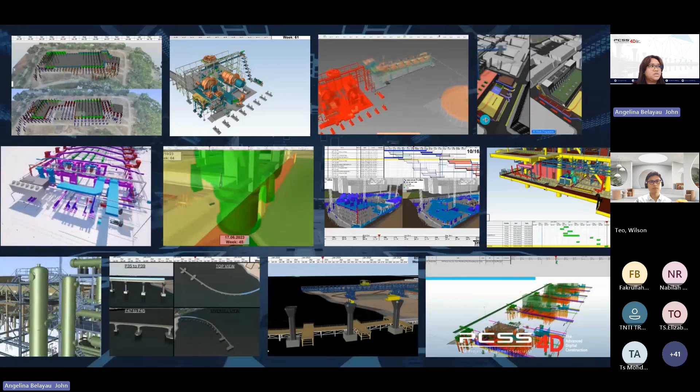Before we begin, I would like to do a little introduction of PCSS. PCSS is a project management solutions provider focused on enhancing organizational profits through the implementation of industry-leading practices. We specialize in digital construction, covering BIM (building information modeling), 4D simulations, and optimization tools such as drones, AR, VR, to name a few. This emphasizes our dedication to staying technologically advanced and providing innovative solutions for the digital transformation across the construction industry in the region.

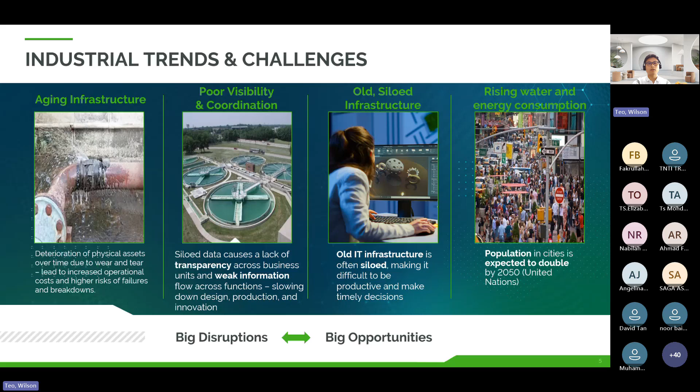Research shows that global population in city areas is expected to double by 2050, and the pressure is increasing. We see that 30 to 40% of fresh water is lost to leaks before it reaches homes, and one city in the US even reported a 40% loss and had to issue a boil water advisory after a major break. Regulatory changes and customer demands for new services mean we need to adapt quickly, and that's why digital transformation is so critical.

Next, we're going to talk about how operational intelligence can benefit the smart water, the water industry. Operational intelligence is all about getting the right information to the right people in the right context. We use our solutions to collect, aggregate, analyze, and display the data across operations to ensure compliance and support accurate decision making.

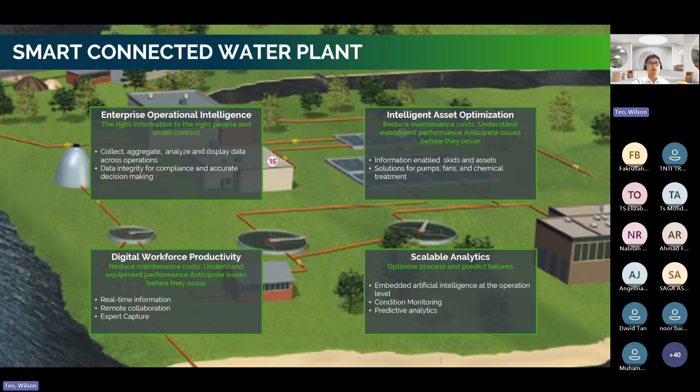So over here, I just want to show you how your smart connected water plant looks like. We are talking about smart plants, smart equipment, smart devices nowadays, and all of them are working together. You can see that all these smart systems generate data, and therefore all this data needs to be collected in order to understand the entire ecosystem. We need a solution for that data collection, data visualization, and analytics.

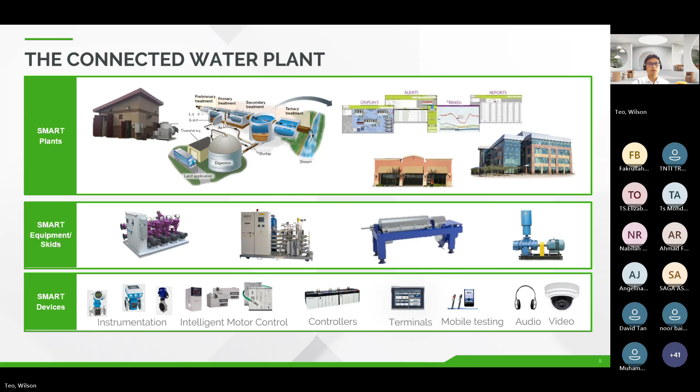Most of the time, they are running in silo or they are not even being connected. So in order to understand the equipment itself, we have to retrieve, we have to communicate with these assets. That can be achieved by Kepware, where we can connect to all the different kinds of assets, all the different kinds of sensors that we are operating at the shop floor or on the field.

And once the data is collected, this information will be fed into the IoT platform called ThingWorx, where the data will first be contextualized. We build models around this data because the data is just a number - without any meaning, without any context, the data will be meaningless. So we contextualize data and then we manage the data - we build workflows around the data itself to automate certain kinds of processes.

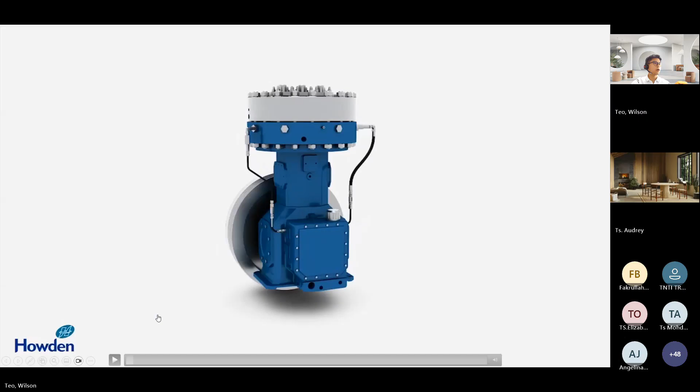Hold on, can you guys hear the audio of it? There's no sound. Maybe you need to include sound when you share the slide.

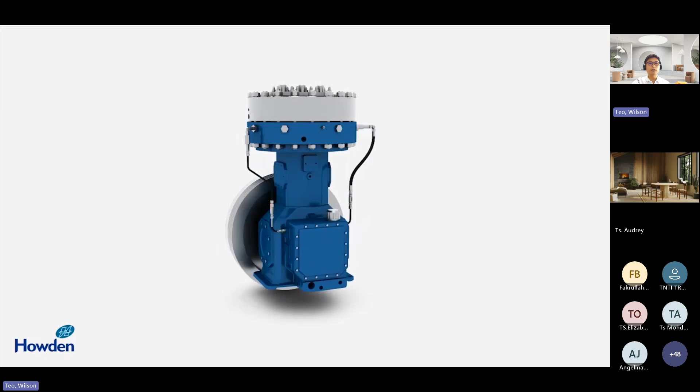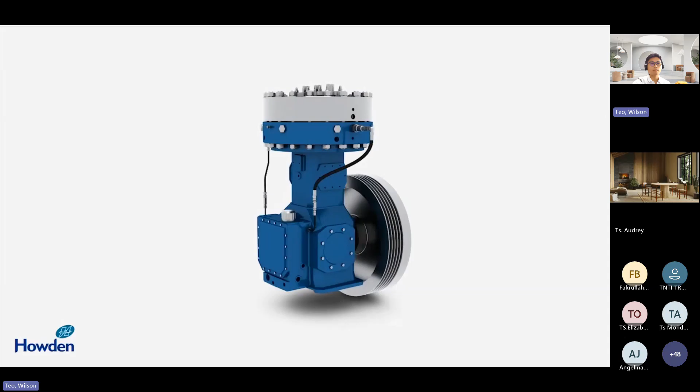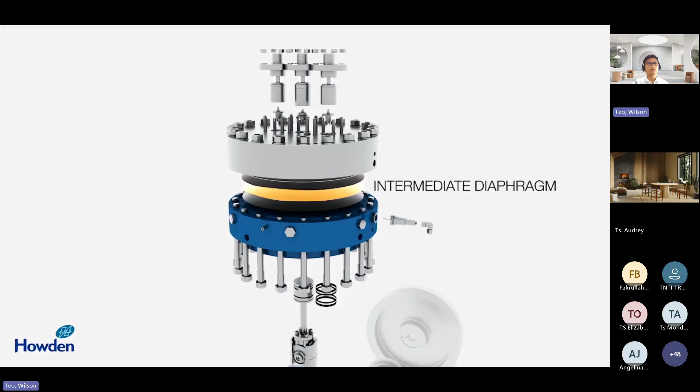In a wastewater treatment operation, diaphragm compressors are often used to convert low-pressure gas or liquid to high pressure through a flexible membrane. Typically used in situations where complete hermetic separation is required, the compressors often handle toxic, flammable, or explosive gases. In our case, this compressor injects oxygen into sedimentation tanks to accelerate microbial sanitation processes. But when a compressor goes offline, it's critical to diagnose and service it as quickly as possible to avoid costly repercussions and keep the plant running at full capacity.

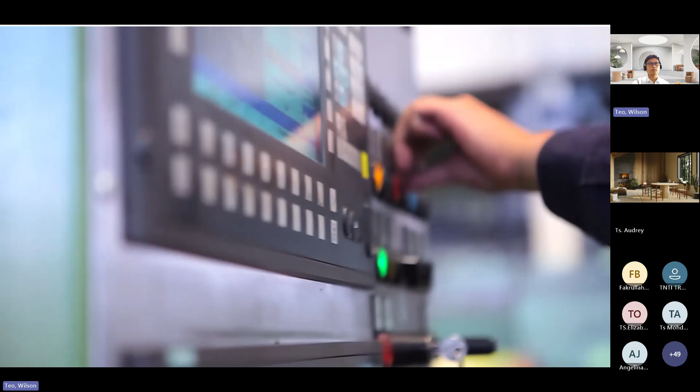With service operations becoming a new profit center for today's global manufacturers, providing tools to efficiently and effectively perform field service is imperative. Through the ThingWorx role-based dashboard, monitoring a fleet of assets deployed at customer sites worldwide provides the real-time data remote technicians need to stay ahead of equipment outages. With this general view of assets, information like model and serial number, location, performance and sensor data, maintenance logs, and predictive analytics, service techs can avoid future failures.

Through the dashboard of all the plant's diaphragms, we can select Diaphragm 1 and see its performance, status, and historical data over the time it's been deployed. Although this asset is showing its status as good, ThingWorx is predicting abnormal activity. For more context, we can view Connected Info, where we can see the readings from the compressor.

There are no active alerts for this machine, but there is a predicted alert for a pressure leak which has been flagged. By constantly analyzing asset condition data and historical data from similar compressors, ThingWorx creates prediction models for the most critical problems. To understand and proactively diagnose the potential issue, we can easily review historical data for pressure, flow, speed, and power on this unit.

Looking at the low pressure and flow rate, we can investigate the predicted failure and determine that this compressor is trending toward a diaphragm rupture.

We've decided that the best course of action is to deploy a field technician to replace the physical part. ThingWorx lets us easily create a service ticket to dispatch a technician with the exact information needed to resolve the problem. With ThingWorx's connectivity, real-time data is brought to the forefront of service operations.

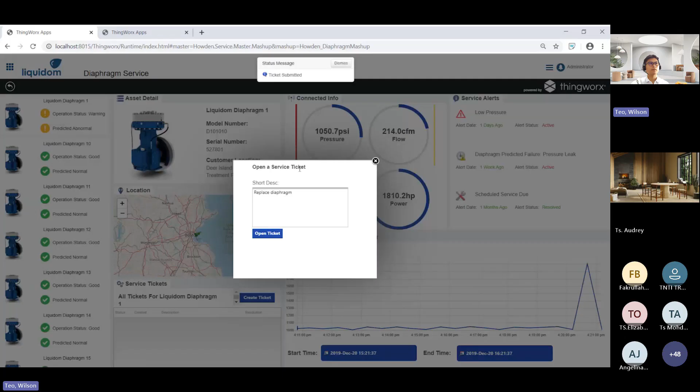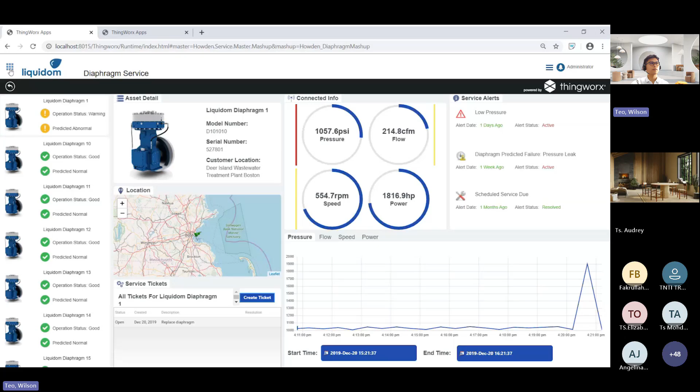On a macro level, the same real-time data acquisition and machine learning can be applied to an entire enterprise. For a plant manager, monitoring a fleet of different assets from different vendors can be complicated and overwhelming. With compressors, blowers, and pumps from vendors like Howden and Flowserve, managers must ensure all assets are operating individually and as a system.

Like the service technician, a plant manager can easily see all individual assets with performance and alert statuses. But a plant manager needs to know more than just the status of individual assets - they need to know the status of the entire wastewater treatment process.

To monitor the entire enterprise's performance, ThingWorx provides an operational overview of the plant, from the intake of raw wastewater via the influent pipes to the sedimentation and aeration processes, through the 3 clarification tanks at the top to the eventual discharge of treated water. Machine performance data and sensor data tracking can trigger alerts and notifications through the sanitation process.

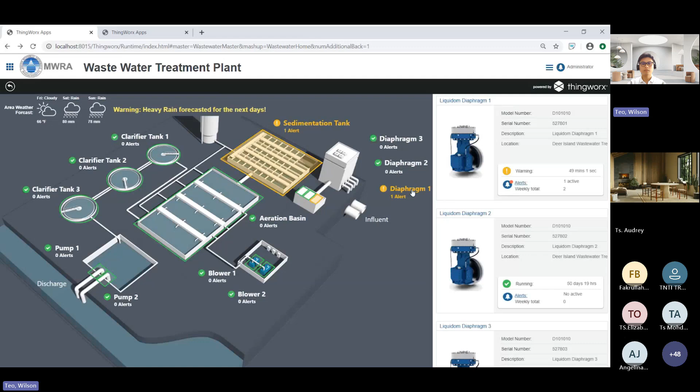In our dashboard, we see the status of Diaphragm 1 has changed from green to yellow. To understand the issue better, we can select the alert link on Diaphragm 1 to view alert details and the compressor's alert history. We can view Diaphragm 1's details to examine the change in the recorded pressure. The alert details reveal low pressure from this compressor, which indicates we have a rupture in the diaphragm.

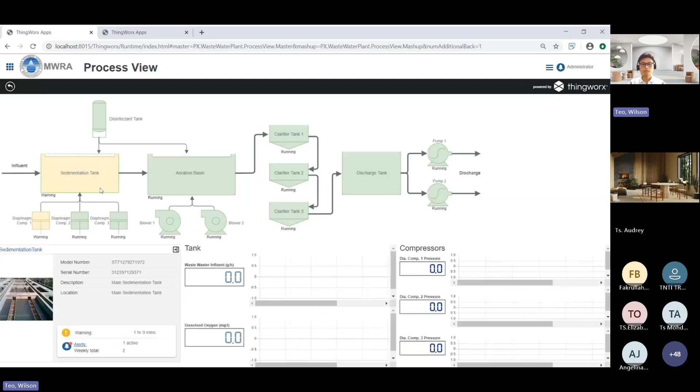In addition to seeing implications on an asset level, we can also see how the rupture is affecting the entire process. From the process view, we see that both Diaphragm 1 and the sedimentation tank need our attention. We've already seen that there is low pressure in the compressor, but we need to understand the issue in the sedimentation tank. Selecting the sedimentation tank shows the dissolved oxygen level is decreasing because the compressor is operating below spec.

This impacts the efficacy of the tank's biological components, slowing the sanitation process and ultimately impacting our ability to achieve KPIs at the plant.

To ensure the rest of the compressors feeding the sedimentation tank can sustain the added load, we can check their status as well. We even have the option to use ThingWorx Flow to automate load balancing across the available compressors, freeing up time to fix the broken compressor without compromising the rest of the treatment process.

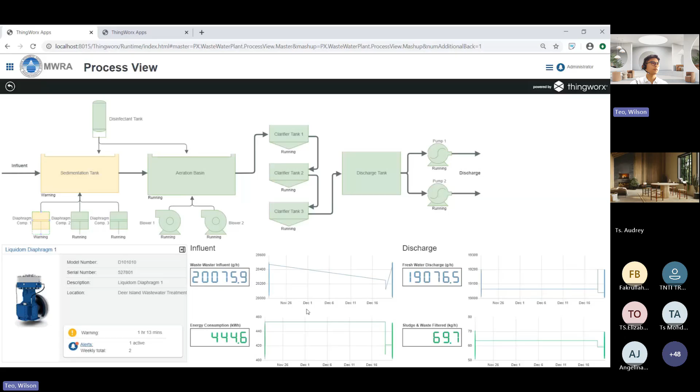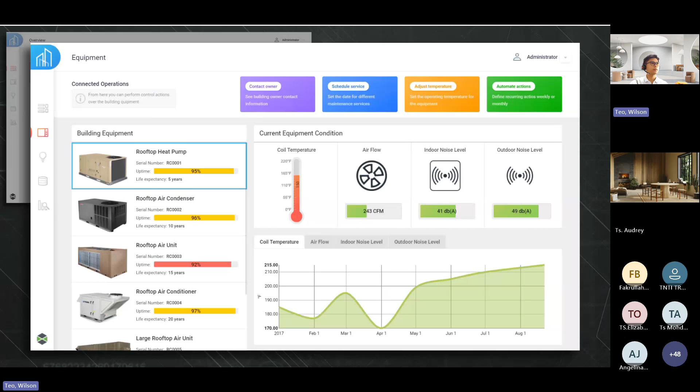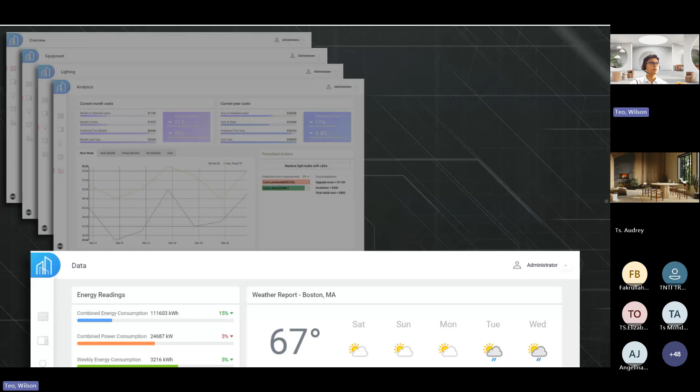With the ThingWorx industrial IoT platform, those tasked with maintaining and managing buildings now have detailed insight and control over their assets. With ThingWorx and our partner ecosystem, you can attain higher performing buildings by creating a new breed of smart applications that delivers energy consumption dashboards and building performance benchmarks, applications to remotely monitor and control heating, lighting, life safety, and security systems, predictive maintenance and condition-based monitoring, and desired environmental conditions and occupant comfort.

With smart, connected applications created with ThingWorx, managing buildings has simultaneously become simpler and more informative. These tools consistently monitor and constantly update, providing managers with the data they need to make informed, proactive decisions, including views of building performance, energy consumption, and the associated costs.

Building performance benchmark dashboards allow managers to rate and compare performance based on various data streaming from both connected systems and connected products. Service costs coming from a CRM system can be combined with energy usage coming from connected meters, creating one dashboard, quickly identifying underperforming buildings and plan corrective actions.

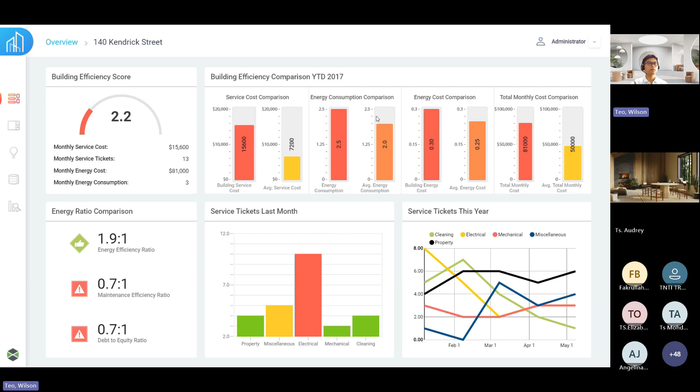When equipment fails, the building fails. Adding a service component to connected buildings, however, brings fast and efficient service for maintaining building uptime.

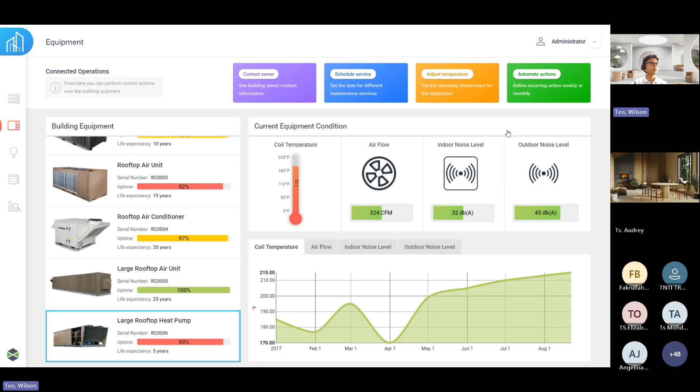ThingWorx industrial connectivity allows solution builders to easily connect and manage the many types of equipment in a building, helping building managers and service departments visualize their equipment, data, and KPIs, while helping to detect issues before they lead to downtime. Combining connected systems and products allows for remote service tasks and scheduling, all from one easy-to-use view.

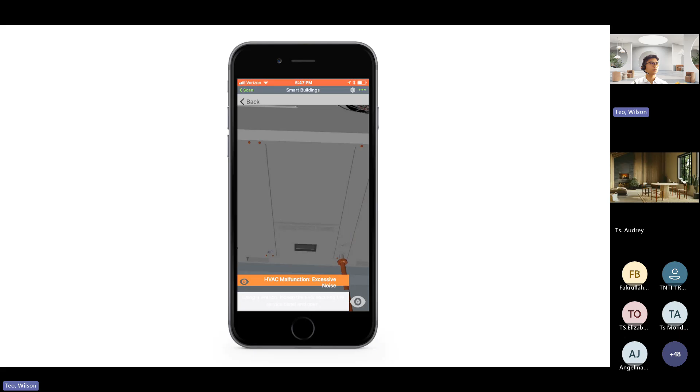Instead of using traditional instructions for repair, a building service department can select AR instructions, presenting easy-to-follow and immersive instructions for equipment repair.

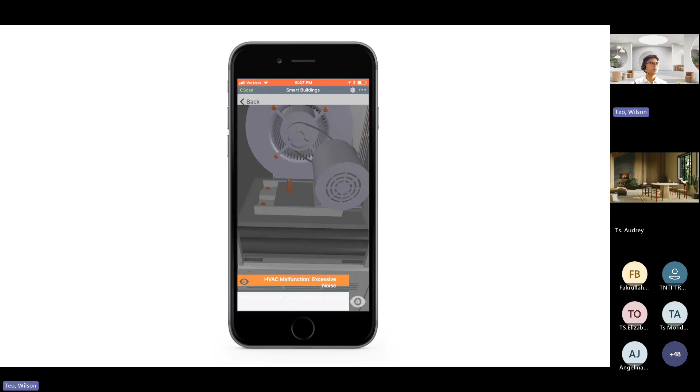Using intuitive, interactive instructions, issues can be addressed and fixed quickly, reducing lost time and cost.

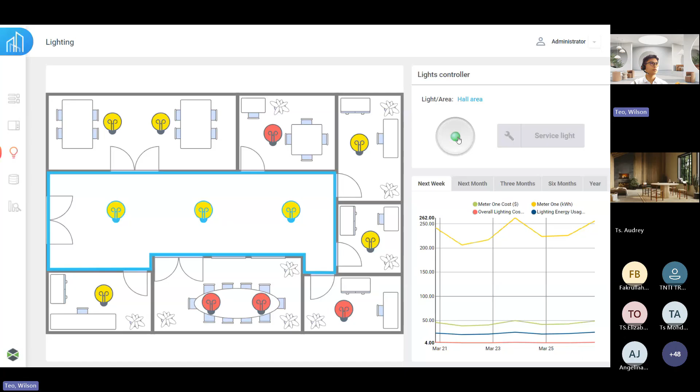Intelligent management of lighting systems is crucial for keeping energy costs in check. With easy integration to smart lighting systems, ThingWorx enables users to create applications to remotely manage lighting and reduce costs, including proactive, autonomous actions to adjust lighting systems based on occupancy.

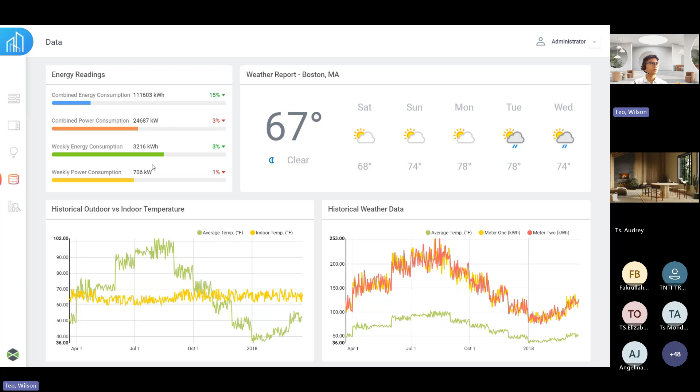In one platform, you can compare external and internal factors to energy consumption, leading to more efficient energy consumption and smart spending. Energy consumption from connected meters can be combined with external data sources, like weather services, to help building managers forecast energy usage. Collecting and analyzing data is the driving force to optimize building operations.

ThingWorx helps customers build a smart building application that pulls and analyzes data from connected products and systems, identifying key trends to help building managers increase operating efficiency.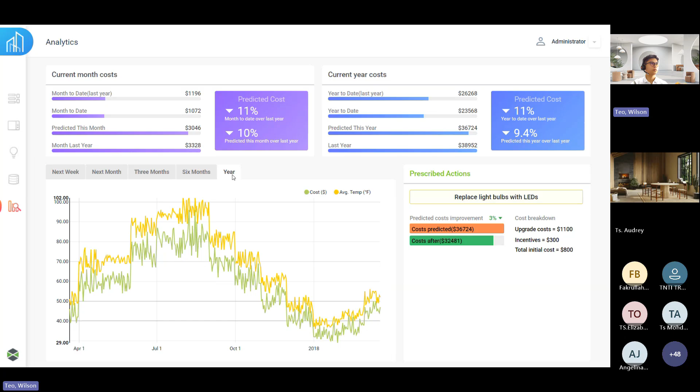A connected building is more than automatic lighting and timed HVAC systems. The connected building is revolutionizing time and cost. With the ThingWorx industrial IoT platform, keeping a smart building running efficiently is a reality, saving the time and money you need to expand and better your assets and services.

All right, so I hope that right now you have some rough idea about how our IoT solution looks like, and how it can be benefited by the water utility industry as well as the facility management industry, like having a smart building, right? So in order to achieve all these solutions that we have seen, I believe that many of you will have the questions.

How do we actually come to that solution? It looks great, right? I want this solution, maybe some of you might be thinking. So over here, I will actually go through with you the how, the behind the scenes. How do we actually come to that kind of solutions? So that you can understand better, and also try to see how these applications can fit into your infrastructure and bring more value.

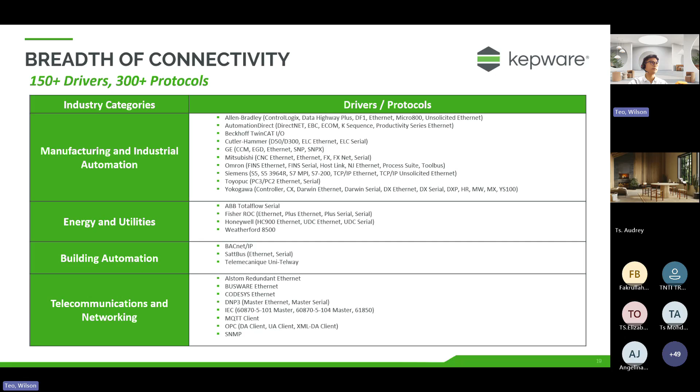These are just a snippet of the entire set of drivers available. So if you're working on a project right now, or have certain connectivity questions or issues, maybe Kepware will be the solution, and we can talk more about that in a separate discussion. So after connecting and retrieving all this data, we have to build a data model to add context to the data itself.

So Kepware completes the connectivity, bringing that data into the platform. In the platform, we have to model the data, adding the parameters as properties, for example running hours, sensor parameters, the location of the pump, etc. At the same time, we can build some analytics - simple calculations like getting the running status, the running duration of the equipment, and the maintenance record.

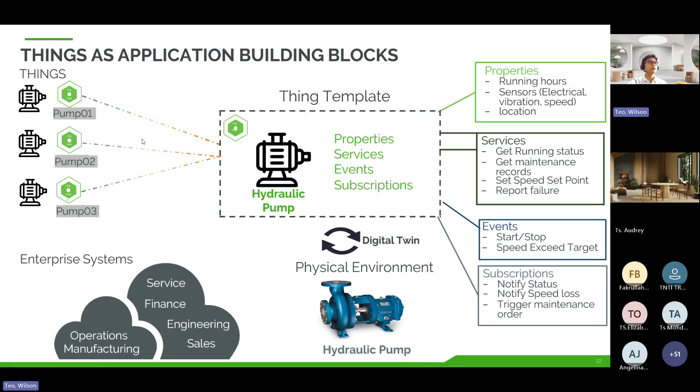So these are just a sample, just one example. You have the properties, let's say the motor speed. And then after that, you can create services to check whether the pump is in running mode, idle mode, or in downtime. So if one of these events happens, that event is evaluated based on the real-time information on your property, then you can trigger an event.

The event itself will be recorded, and subsequently you can create a subscription to subscribe to this event. The subscription will provide or generate notification to the operators or the equipment owner through various ways - for example, SMS, for example, email. So depending on whichever approach you want, we have all this capability built in.

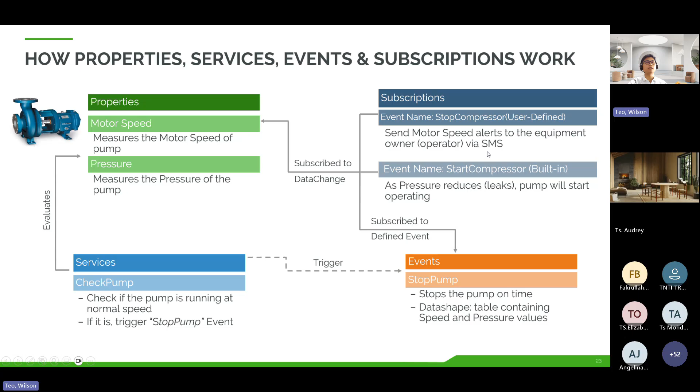So next is analyze. Analytics itself has different levels, and different levels of analytics provide different kinds of business value to the end users. Starting from the low level, we talk about descriptive analytics - basically to tell you what happens. That's mostly after the event has happened, so you want to do some root cause analysis using descriptive analytics.

The next level of analytics is predictive analytics, where you want to predict when this asset will fail, so that you can take preventive measures before the machine breaks down. That is to avoid equipment breakdown - you can do maintenance before it breaks down based on the predictive analytics result.

The last level is prescriptive analytics, which is basically to advise the users what can be done to prevent a certain event from happening. For example, you can suggest that lowering the temperature might prolong the lifespan or operation duration for a pump. So prescriptive analytics is able to provide that kind of information. With all these different types of analytics available within our IoT solution as a built-in module, you don't really need to rely on a separate analytic system to do analytics and then pump back to the systems - everything is in a single box.

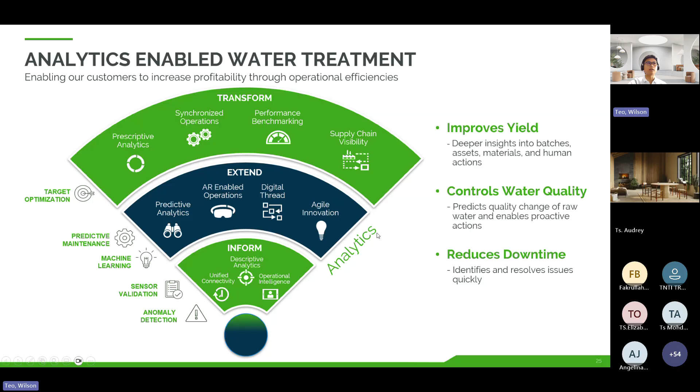Our analytics module can do various analytics like I mentioned. It can show you some descriptive analytics like statistical calculations - the average, the mean, the distribution, the confidence interval, and all that.

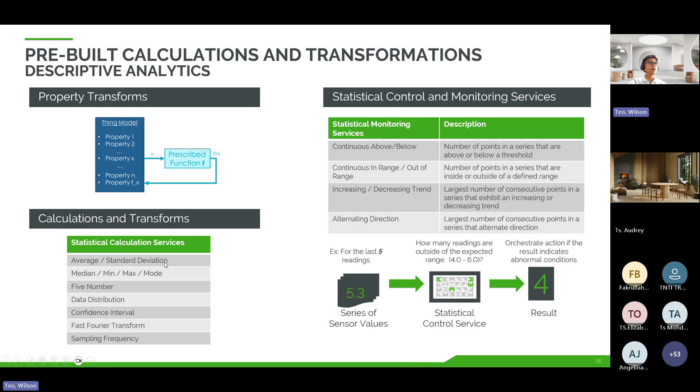After that, the next one is basically doing diagnostics - evaluating the information of your assets, your pumps and all those, and finding the relationship between those informations. For example, if we want to talk about whether a machine will break down or not, maybe the motor speed of that pump has a high relationship, a high significance, to that event. So our analytics is able to generate that kind of information, showcasing what parameters will impact the outcome of a certain event most significantly.

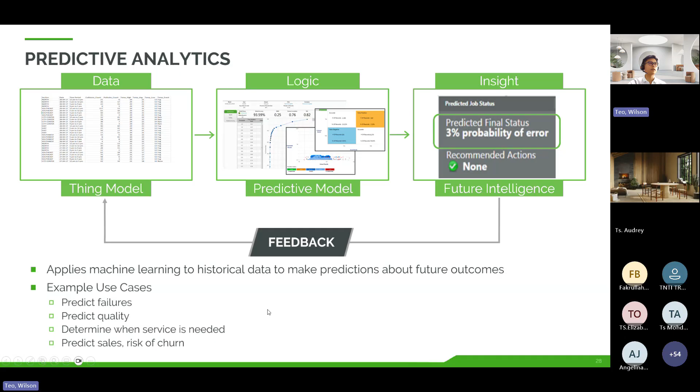So various use cases you can apply with our analytics. These are just some examples for the technical guys who are more interested in what machine learning algorithms are built into our analytics module.

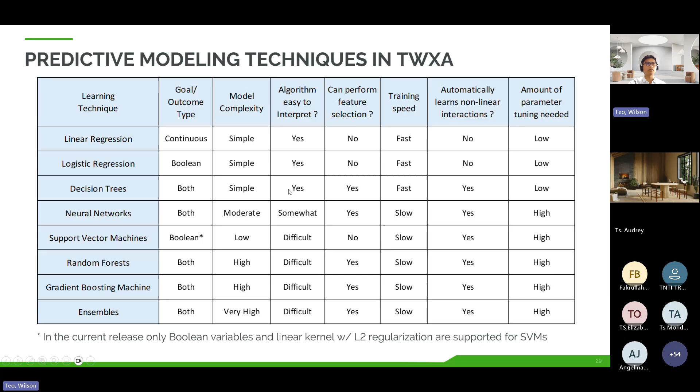Depending on the use case and the goals you want to predict, you can use the relevant machine learning algorithm. If not, the system will be smart enough to help users determine which machine learning technique is most suitable for the use case, based on the accuracy of the models and predictions.

And these are just machine learning. So just now I mentioned we're talking not just about conventional analytics, but now it's more about generative AI—using things like large language models to process your data and generate insights for users. It's like a ChatGPT kind of thing, but applied to your system, your data, your operations.

Let me show you quickly. Within our platform, we've come up with a very new feature, which we call the ThingWorx AI Assistant, whereby we use a large language model applied onto the historical operational data collected from the field, and it tells you the insights from that data.

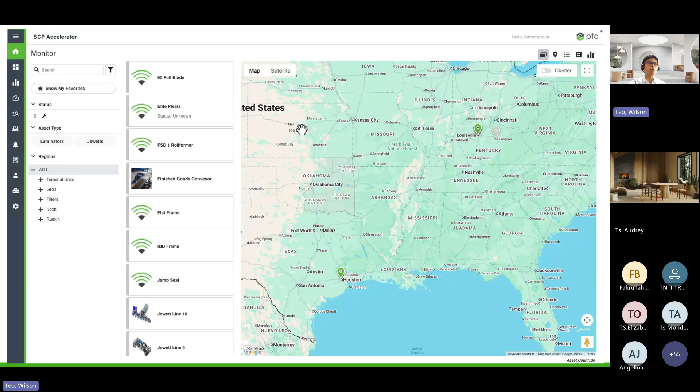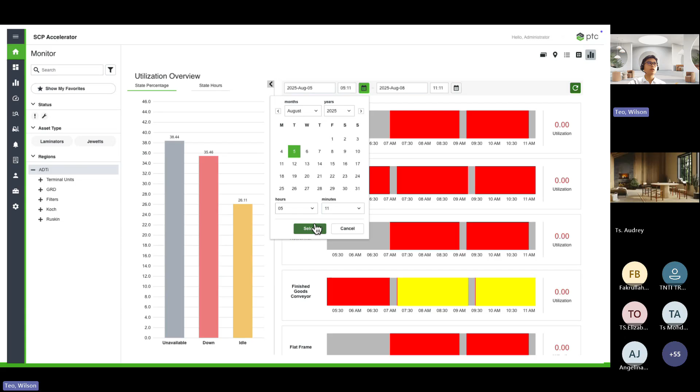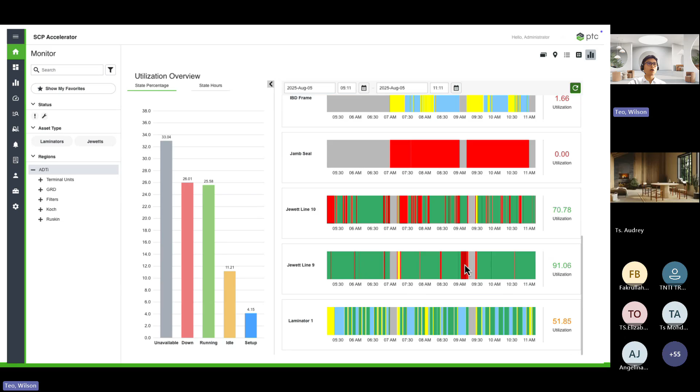Let me play this video to show you how LLM can generate more insights from the collected data. So assuming you already built an application using ThingWorx, this is basically to monitor the utilization of your assets—for example, your pump. You can track when they're running, when they're not running, when they're stopped or in downtime, and different kinds of status. So this is for real-time monitoring.

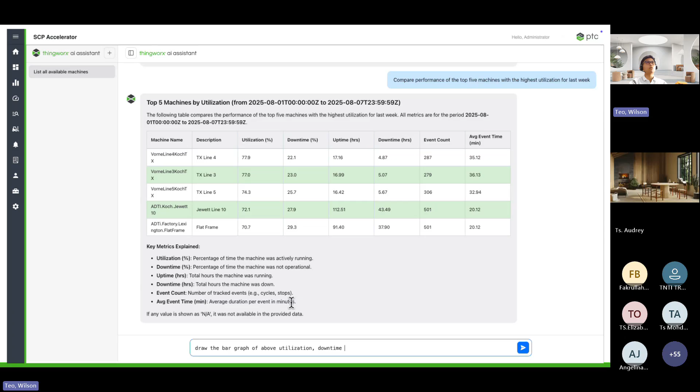With technologies like Gen AI, we can chat with the technology and it will give us the results of our questions—it's like prompting. We ask, for example, can you tell me the top 5 machines with the highest utilization for last week? The LLM will look into the collected database and give you this kind of summary within just a few seconds.

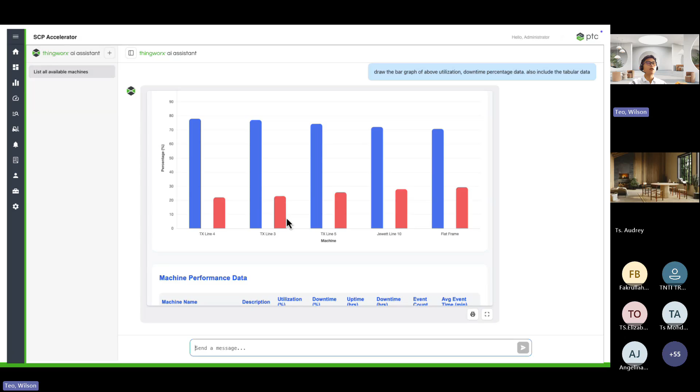If you want to generate a dashboard or reports, the technology will also be able to use the data to generate it for you instead of you building your own custom reports or dashboard. So basically it simplifies, increases efficiency and productivity, just by leveraging whatever data you've collected in the past.

So this example showcases how you build a custom report or custom dashboard, not using the software itself, not by configuring the software, but using the generative AI technologies, and then you can export this report when your supervisors or management request it. And all this information is in real time also.

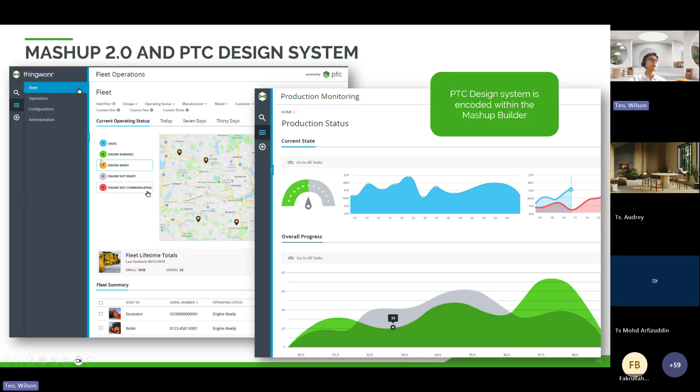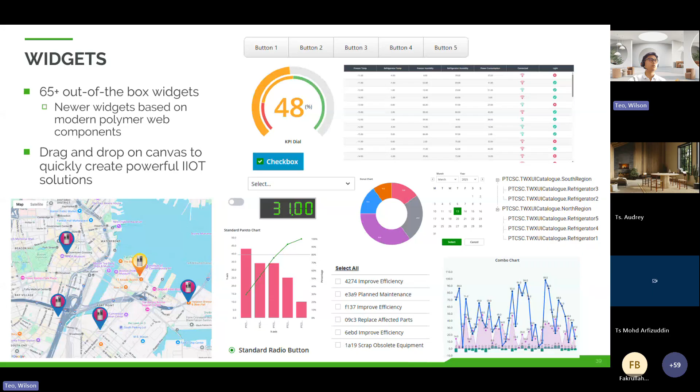Where you can simply drag and drop the widget to the canvas to form your dashboard. With this widget on the canvas, we can bind data to the widget to show the corresponding information. So these are just some examples of the available widgets that are out of the box and readily available, like if you want to show your information in a radial gauge format, an area chart format, a map, a label mode with different colors, a table, and so on. So these are the widgets that are out of the box and can be readily used by the user itself. No more customization, no more coding, no more scripting when you want to build your dashboard.

So with that, that is all about our IoT solution, all the way from connect, then building data models, doing analytics on top of the data collected, building process workflow and business workflow on top of the data, and then displaying or publishing that information to the end user through dashboards.

So right now I want to share with you some customer references apart from the two videos you have watched. The first one is Veolia Water, basically a global leading water company specializing in providing sustainable water and wastewater treatment solutions for industrial clients. The challenge they are facing right now is basically their lack of real-time information of their systems.

They are not able to monitor and control the system for domestic water and sewage service providers, and because of lack of monitoring, they are not able to get real-time information. That actually slows down their maintenance efforts and also disrupts their operation very often.

So with that, they basically built an application they named Waterworks, built on top of the ThingWorx platform, to connect to their assets and different systems, to bring real-time information to their operational team. They also built workflows using the platform to generate alarms, voice alarms, and SMS to alert their maintenance team to fix the issue before it gets too long.

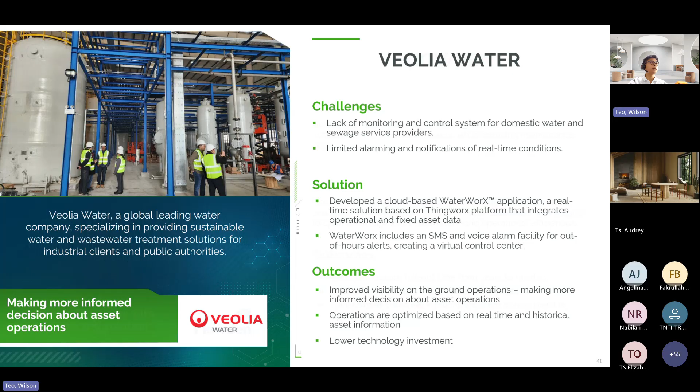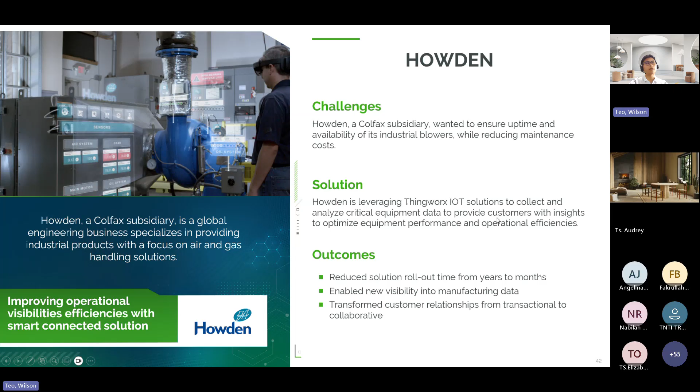And the other customer we have is Howden, which you just saw in the video. Basically they are using our ThingWorx IoT solution to collect and analyze their critical equipment data, to provide customers with insights and also to optimize equipment performance.

And lastly is Flowserve, a global leader in providing industrial flow control equipment and services, including pumps, mechanical seals, and valves. The challenge is pretty much similar to the previous use case. They have difficulty monitoring pumps, and because pumps easily undergo cavitation, they are unable to capture that in real time, causing some downtime and also failure.

So it's causing some downtime due to the failure of the pump impeller. They actually created an application using ThingWorx to monitor them, and at the same time make use of analytics to do predictions, so that they're able to foresee or inspect a pump when the prediction shows it's going to undergo cavitation, allowing them to service the pump before cavitation happens.

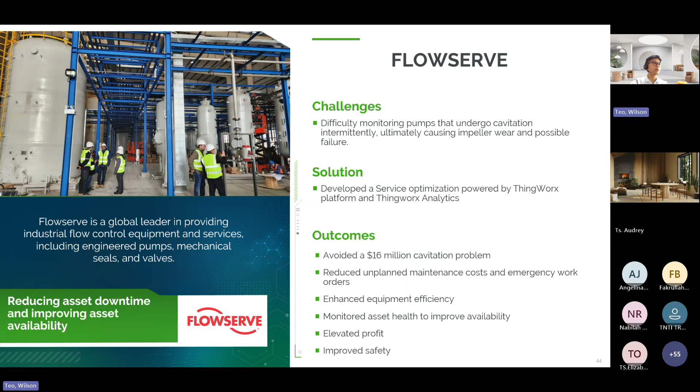So I'm just going to show you quickly a video about these customers.

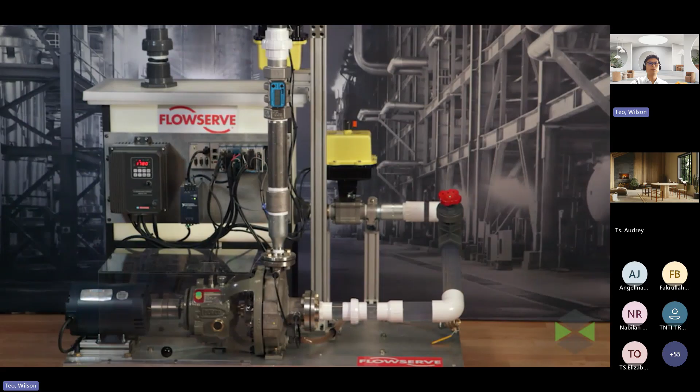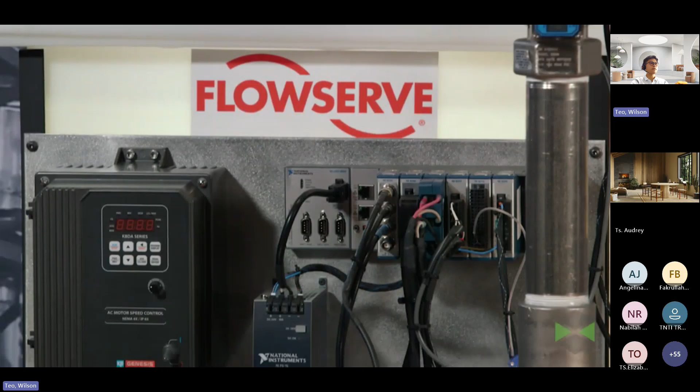Flowserve is a leading manufacturer of flow management products. Their pumps help move, control, and protect the flow of materials in critical industries around the world. If one of these pumps goes down, the costs and lost opportunity can run into the millions. This rig uses a Flowserve pump, similar to those used in critical industries, to circulate water. It has been retrofitted with six sensors provided by National Instruments, and a high-performance computing solution from Hewlett-Packard Enterprise is enabling analysis of the data.

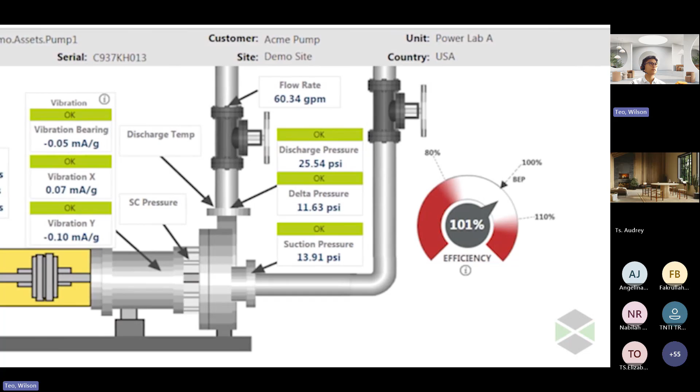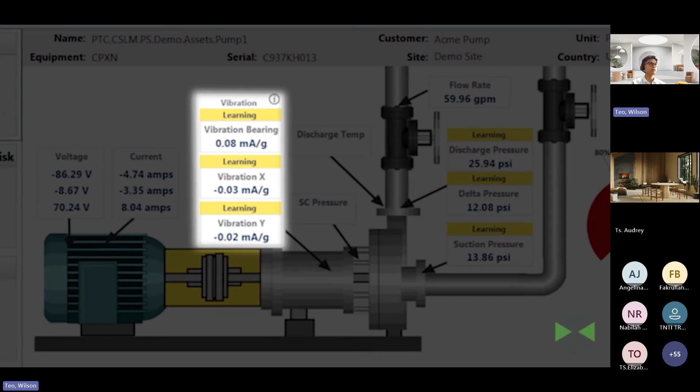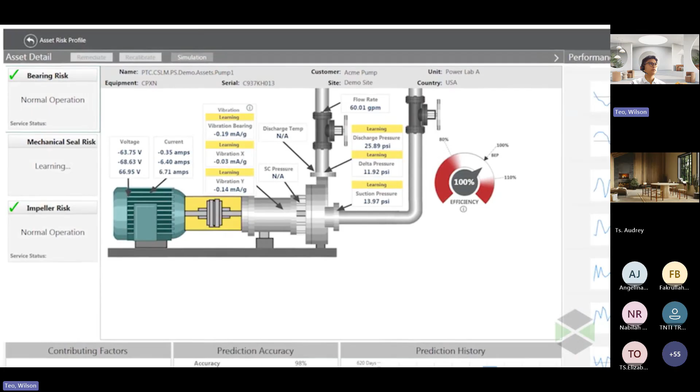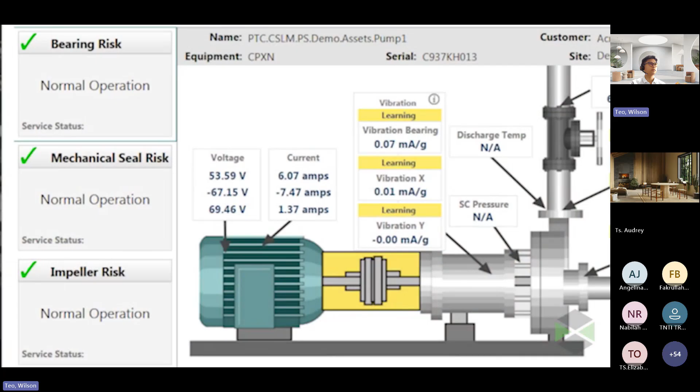ThingWorx machine learning allows you to know more, do more, and get more from a machine like this. What you're seeing at work here is the automated edge sensor analytics technology behind the platform called ThingWatcher, part of the ThingWorx analytics capabilities. Each sensor reading that has a learning flag above it tells ThingWatcher analytics to learn normal operating conditions. Remarkably, the automated process does not require you to predetermine any hard and fast rules—it learns in real time about its environment. Determining what's normal and abnormal from the sensors themselves, the software then correlates the information with peak efficiency conditions. The OK indicators you see here tell you the sensors have learned what normal is and are functioning well, with no anomalies detected.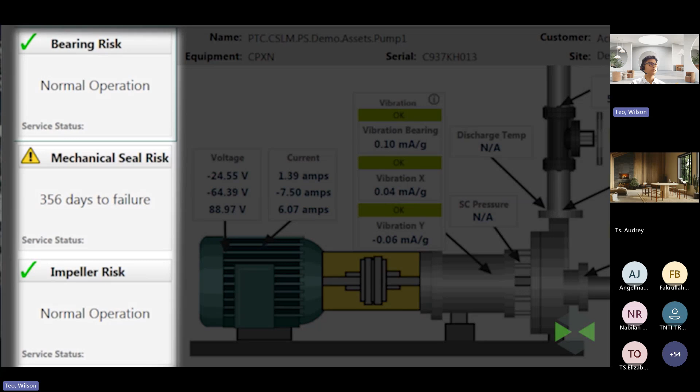To the left, you'll see future predictions, three outcomes predicted by the platform's ThingPredictor technology. The automation you're witnessing in real time is ThingWorx Analytics evaluating the remaining number of days until each of these failures is likely to occur next. What's truly extraordinary is that there is no need for anyone to be constantly monitoring the machine—it's instead being self-evaluated all the time at a rate of 30,000 readings per second per sensor.

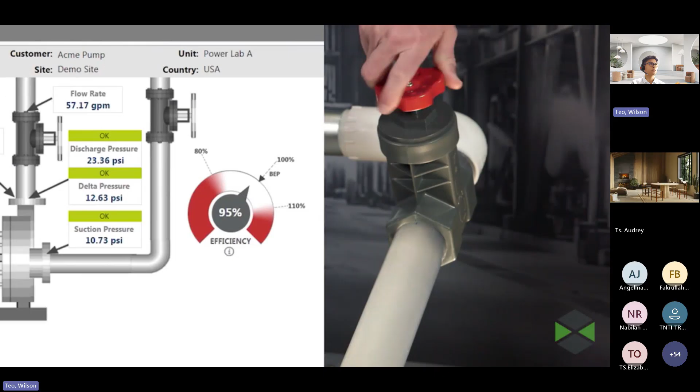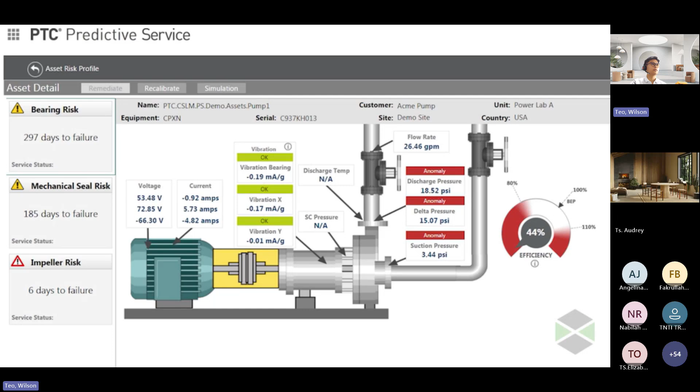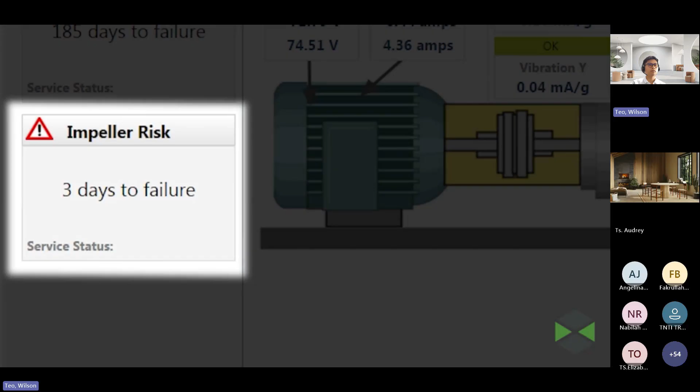We've turned on the pump rig to demonstrate what happens if something changes or goes wrong. Let's make a few things go wrong on this pump to show ThingWorx Analytics working in real time. We're going to simulate a reduction in flow by closing this valve. As you can see, the software immediately responds to the change of flow. What's happening is that ThingWatcher is automatically detecting the flow problem and sending real-time notifications or alerts. Critical sensor readings are being flagged, pump efficiency is dropping, and the impeller is at risk of failing if the problem is not immediately addressed.

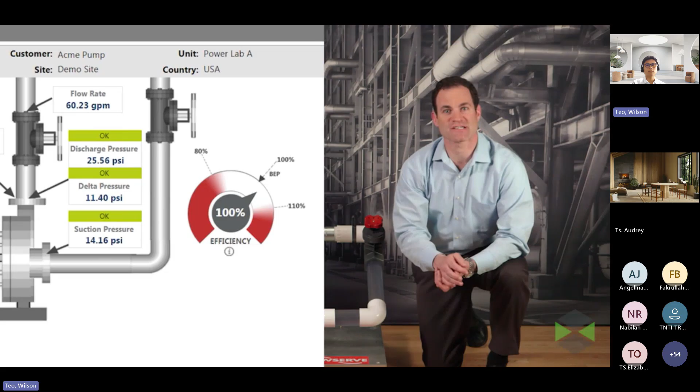When maintenance is delivered, the numbers return to normal. So as you can see, the problem can be resolved before it becomes an expensive pump failure or serious downtime occurs. Let's throw another problem at the system and see how it works.

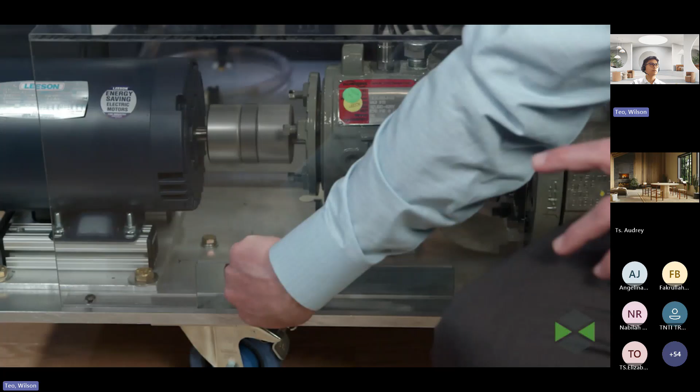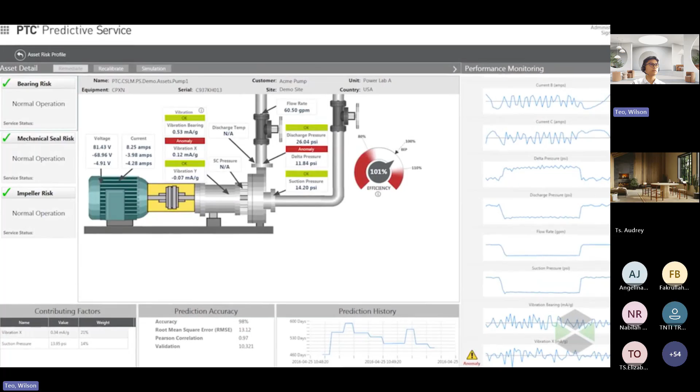I'm going to shift the alignment of the pump by lifting the main housing through the pull of this black bar. You can hear something is wrong. But let's imagine a remote monitoring situation where there's no technician around to hear this—you need to rely on real-time monitoring. ThingWatcher is reading anomalies to flag negative changes to the pump efficiency gauge, which immediately triggers. The system can also simultaneously send an automated phone call to a technician, alerting them of the problem. Once the problem is resolved, the numbers return to their normal state.

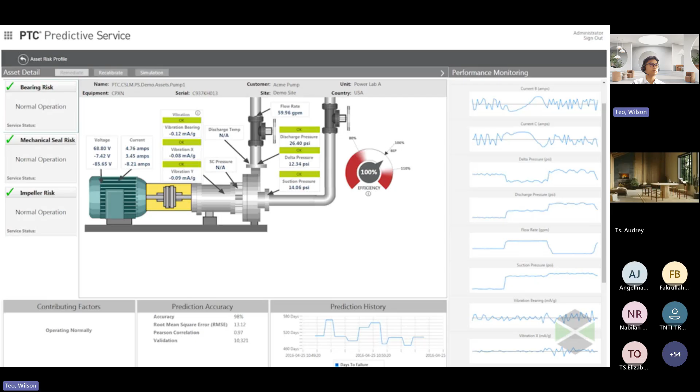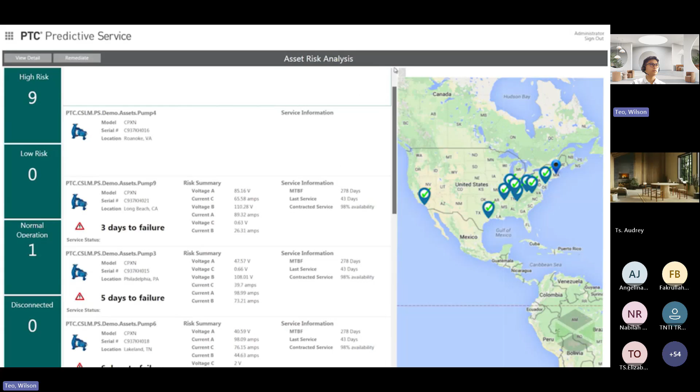You can imagine the level of control and visibility this technology can provide within your central fleet, offering an incredibly responsive view of the usage and condition of pumps all around the world from one location. This demonstration featuring PTC's predictive service solution is just one example of the hundreds of ways the transformative power of machine learning delivers value. Through that power, the ThingWorx platform enables unprecedented access to connected intelligence synchronized to your machines—a platform of data analysis and systems learning delivered with utter simplicity. Out of the box, the platform helps machines teach themselves using information to predict, detect, and even fix production hangups.

All right, with that, that comes to the end of my sharing session.